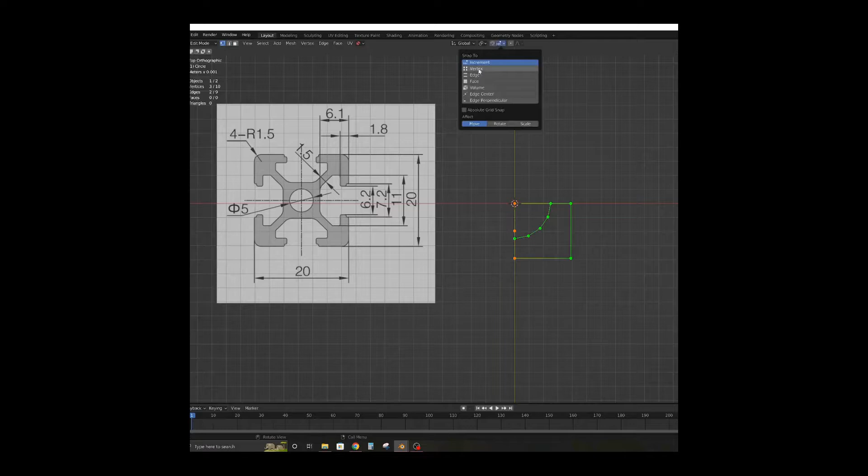Welcome back everyone. In the previous part of this series, I modeled the aluminum extrusions. Now I will use the extrusions to design the frame of the printer. There are many great designs and kits out there, so I will not be reinventing the wheel. I will mostly be taking ideas from these designs to suit my needs.

I need my build to achieve the following. It should be Core XY to maximize print quality and speed. The bed should move in the Z-axis. The design should maximize the use of off-the-shelf parts. Sourcing custom parts can be a real pain. It should be scalable to any required size.

The most popular choices amongst the Core XY designs are the BLV Cube, Voron and Rat-Rig V-Core, so I will be basing my design on these printers. The BLV uses 2040 extrusions, which should make the frame a lot more rigid. The V-Core also has the option for 3030 extrusions, but it's much easier to source fasteners for the 20 series extrusions. The Voron uses 2020 extrusions, which can compromise rigidity at larger build sizes. The Voron 2.4 belted Z-axis is also complicated to set up.

A combination of all these factors led me to design my own printer so I can take what I like from each of the designs and make something unique and tailored to my requirements. I have based the frame of my printer on the BLV Cube because of the 2040 extrusions and easy availability of the metal kit. Using printed parts for the printer mechanics will reduce the rigidity and reliability.

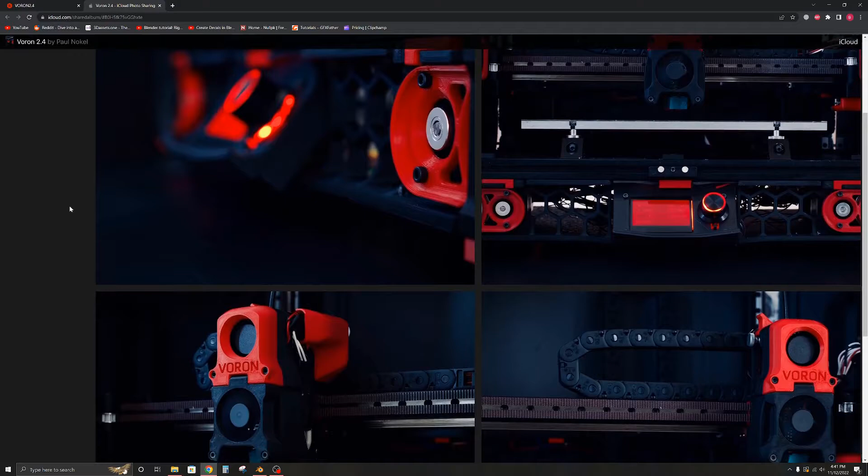The Voron also has a metal kit on AliExpress, but it is a lot more expensive and not as easily available. I did not order the full frame kit for the BLV Cube because I wanted a custom build size and I wanted the design to use standard size extrusions. They are very easily available on AliExpress.

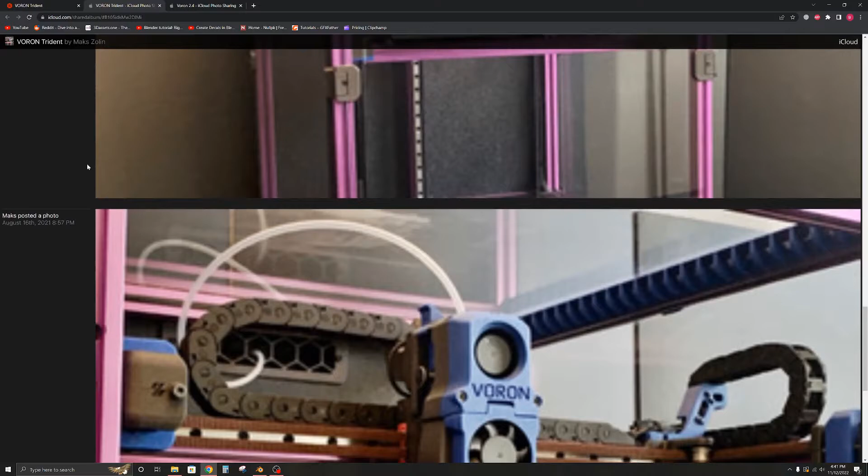Getting back to the design, let's open up Blender and get to work. CAD Transform is a must for this type of work because it makes the aligning process very easy in Blender. I have limited myself to use only two sizes of the extrusions to keep it simple. For my build size, I am going for 500 and 550 mm extrusions.

I had already made a mock-up of the design in SketchUp earlier, so you can occasionally see me referring to it. While SketchUp served me well initially, it was a bit limiting as the design progressed and SketchUp itself started lagging, so I made the switch to Blender. Blender is completely free and much more capable, although it does have a bit of a learning curve.

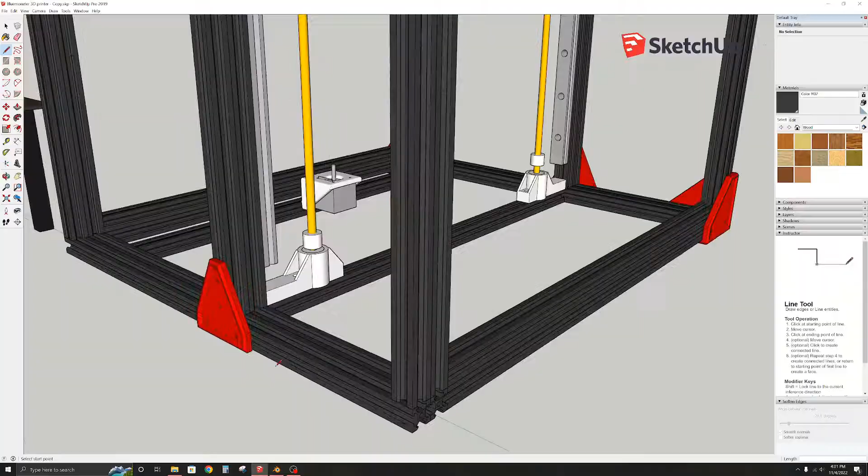I will be using blind joints to connect the extrusions as they need minimal hardware and are much stronger. I just changed the viewport display color as the default was kinda boring. Here you can see that this extrusion needs to be longer. 510 mm to be exact, but as I have limited myself to 500 and 550, I will design a 10 mm spacer. It can be printed, or maybe I will make one on the lathe. You could also pile up a bunch of washers to get the same effect.

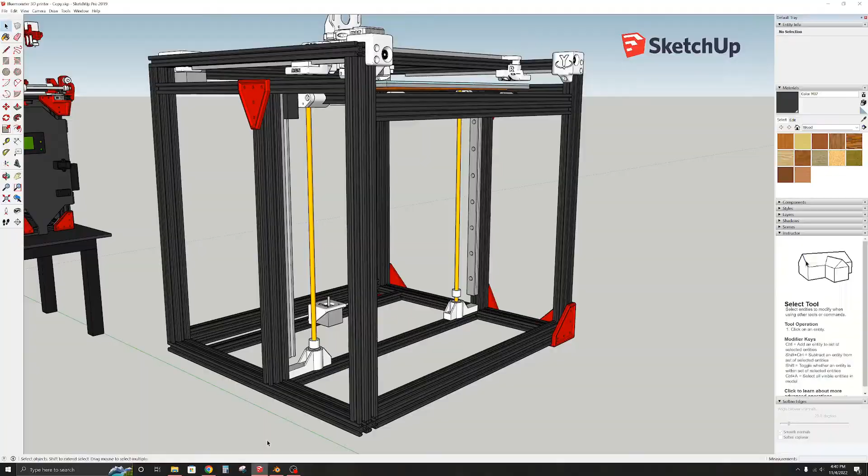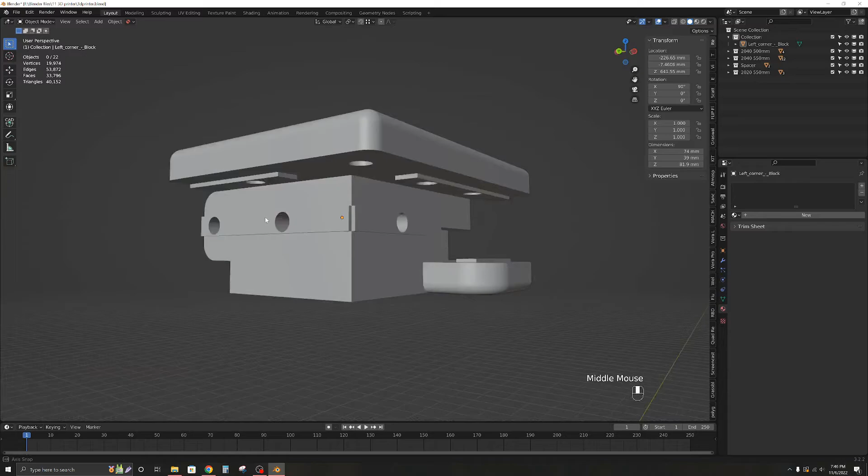Now that the initial frame design is complete, I need to bring in the parts from the BLV metal kit. I tried to look for the models or drawings of the metal kit parts, but I did not find anything. So I decided to use the original STL files from the BLV website. The size of the printed parts and the metal kit parts is almost the same, so I can use the STL files as placeholders to proceed further with the design. However, in the final build they will be replaced with the metal kit.

Blender makes it very easy to import STL files. The STL files by BLV are already pre-aligned, so I just need to bring in each section, merge it, and align it in its place. I cannot stress enough how useful CAD Transform is for the alignment process, and it is completely free. I would recommend everyone to use it if you will be using Blender for any precision work.

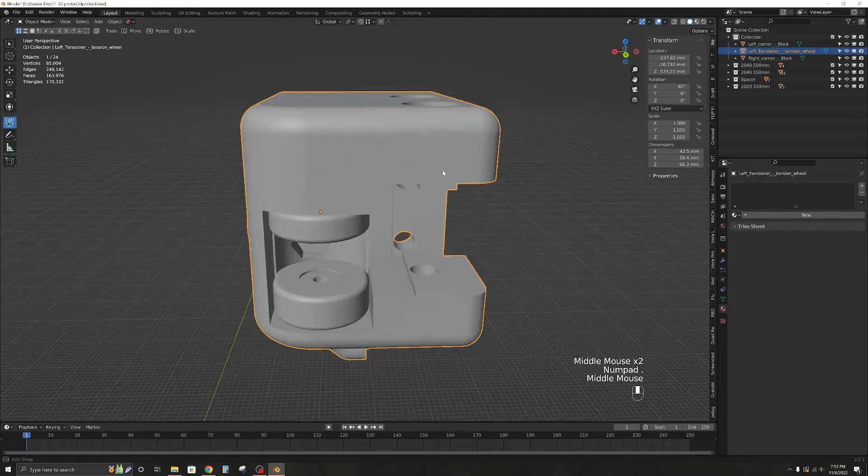I have finished adding in the right and left corners and belt tensioners. The next part is the X-carriage mount, but for that I need to model the linear rails.